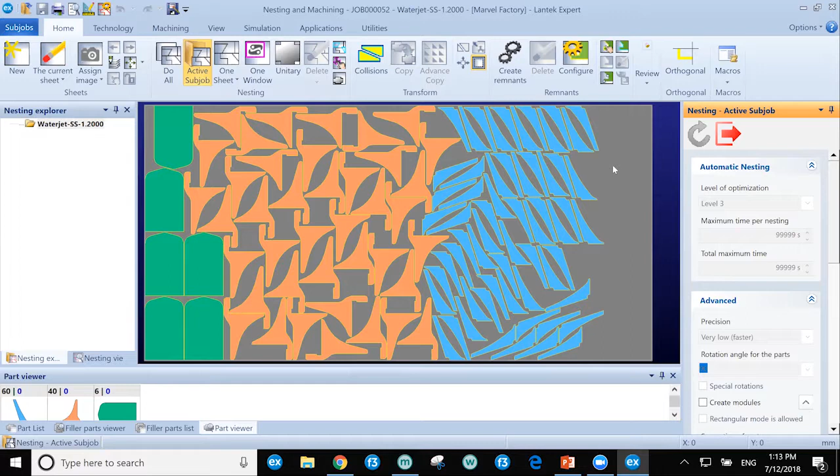Okay, so I went ahead and clicked on our Do All button. This is something Lantek's pretty well known for, the ability to dial in your particular requirements based on your material type and your thickness and your machine tool. So very specific settings and rules that you can make, and Lantek will apply those rules. In this case, it's looking for remnants that it can use to eliminate additional scrap.

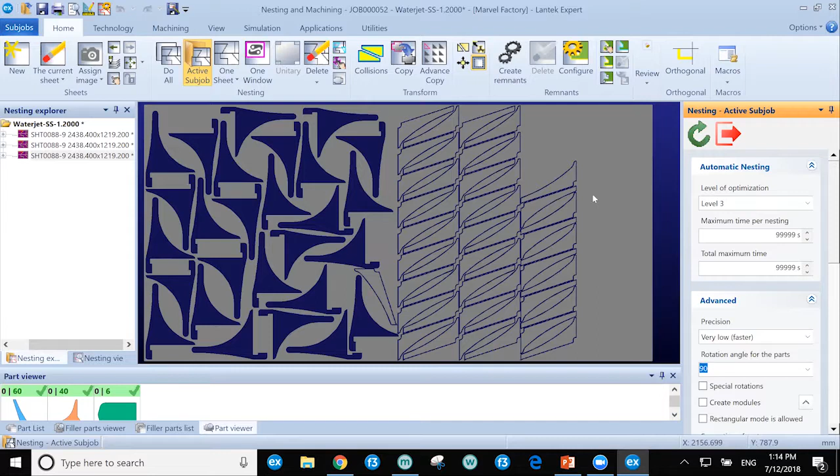It's going to go through and nest all of the parts, and then at the end it's going to ask me what we call the 20% questions, things that you may only want to change 20% of the time, but so that you don't have to go digging through any sort of menus, they pop up for you. Of course, these can be disabled as well. Now that we have our nest created, we can look at the different sheets that we're using. It looks like we were able to use 3 different remnants, which is good.

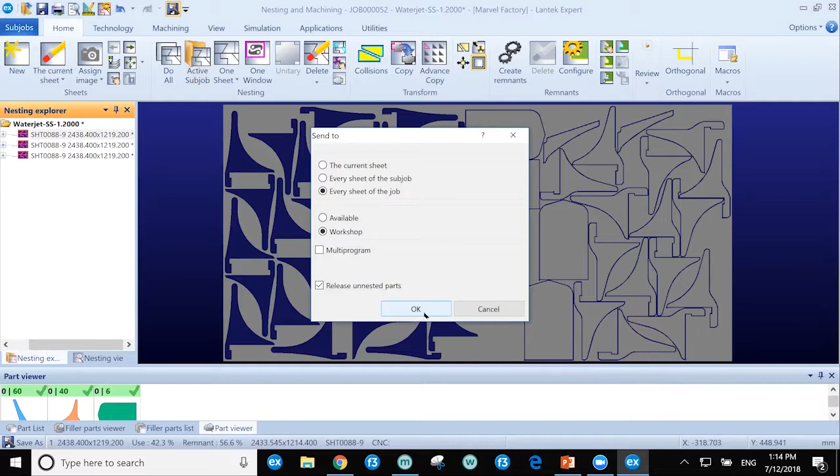We could spend all day on probably nesting, so I'm just going to go ahead and show you how it goes back out to the workshop. With one click, I can send every sheet of the job to the workshop and then have it release any unnested parts. So parts that did not fit on the amount of materials we have, or that for some reason I just didn't decide to have in my program. We can also automate the naming and saving of your CNC files and the directory to where those go.

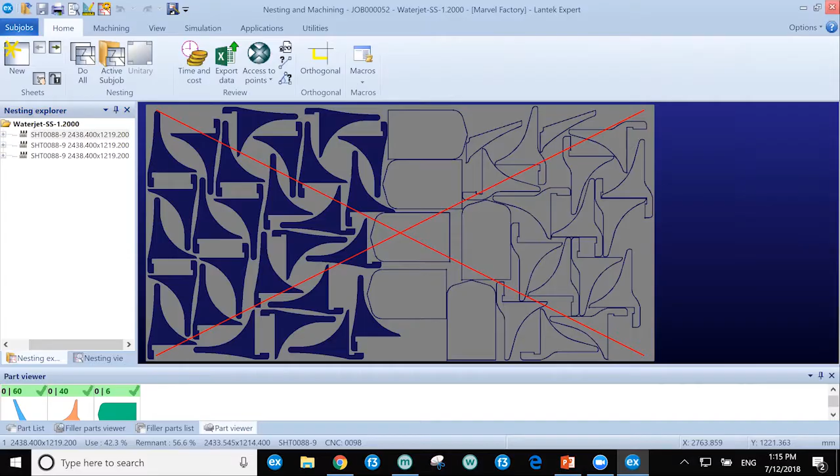And at this point, we're finished. So we have all of our tooling, machining, and you'll see this big X means that this has been sent to the workshop. Once we're back into Manager, we close that window. Manager is here for you. And I think what we could do now is basically look and see what others using the system might see.

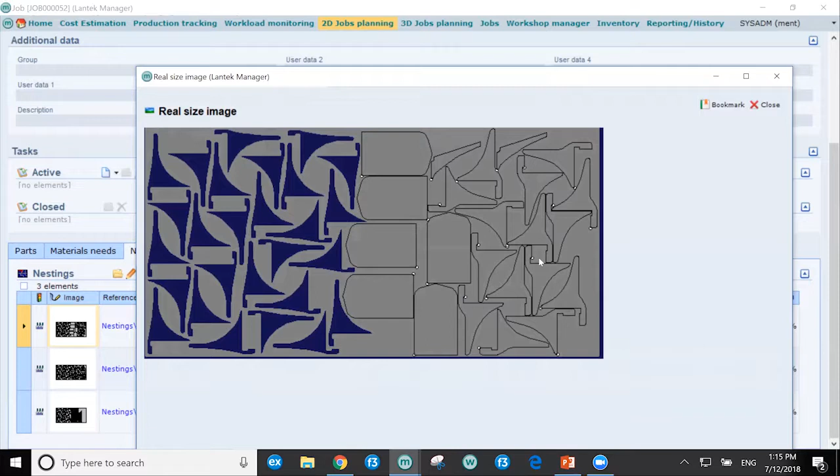If somebody wanted to look up this job or look for a particular part in this job, they would be able to get a quick view of the nest itself, without having to start a CAD/CAM license or require any additional project or products. We can look at estimated times that are going to be required for this specific nest. We can look at how close we are to our deadline, and we can see, with and without the remnant, what amount of the sheet we are actually using, keeping in mind that those were on remnants already.

Then the next probably most common place for our users is going to be in the workshop manager side of things. And this is where once all of those jobs are created and sent into production, users are able to go in and see not only where things are in process, but to find out what order they might want to do things in. In this case, we can click on our fiber laser, we could go to our water jet, and we have the same indicators here.

So those 3 nests that we just made, those remnants are not at the location required for this machine. So we have these red light indicators letting us know that perhaps somebody with a forklift needs to go and bring those 3 remnants that we nested on to the machine tool. We can see any amount of things that are in process with their estimated times, and we can change the priority of these on the fly, assuming we have the right permissions. So for example, I may want this sheet of this nest all within job 41 to go next. There may be a hot part on there that I have to get.

We also have the ability to take kind of an even higher level look at our workload monitoring. For example, on the press brake side or on the water jet side, I could go over and filter what I'm looking at to see, in general, what am I looking at as far as my deadlines and whether or not I'm going to be on time. This deadline, you'll see here, is yellow. It's an adjusted deadline because we've already exceeded our delivery date on some of these items. And so this is our new deadline that we've associated for ourselves just by going through and saying calculate the deadline. We can also get an idea of a couple of production orders, and see that those are going to take 47 minutes to get to for our users.

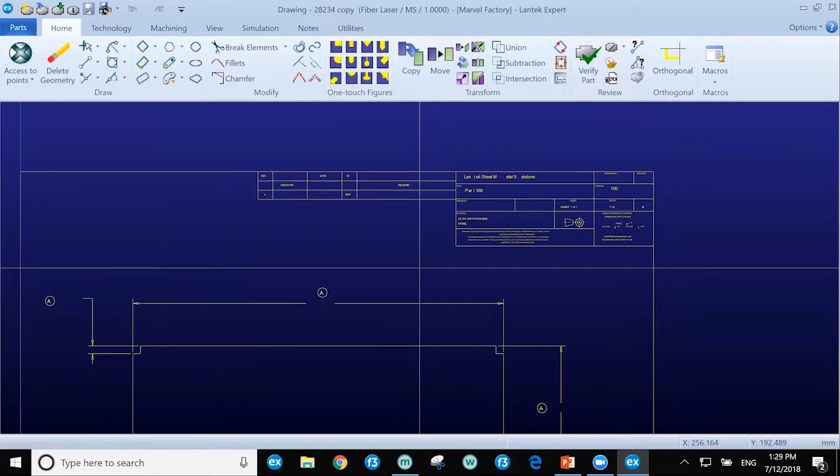But if I go into our drawing mode, we have a tool that will allow us to quickly grab the pertinent geometry and avoid all of these other drawing block details.

And that's called our Detect Part tool. And by just clicking on any piece of the outside geometry, I'm able to bring in the part's geometry itself. If I wanted to modify the geometry, I could. And I can also go in and actually change any of the types of cutting process if we maybe had some bend lines in here, or give it a scale factor. In this case, it'll use dimensions to scale the part. And we just click OK.

So now that I've created that part, the system can order it, or I could just simply see, what is that part going to cost to make? As soon as I assign it a machine tool, which I did, the fiber laser, I'll be getting a cost and an estimated time for this.

And that cost is going to be the material that I've selected. Depending on my settings, it could be a rectangle drawn around the part, or it could just be the external geometry of the part with some sort of a buffer. But this gives you an idea of how you can know what this cost for this part is going to be with very little interaction for getting to the quote.

I can even assign it like we did before, I can assign a new routing. I could take our laser, bend, weld, and ship here. And I can put in or have calculated the estimated times for these. So if I feel like I know the estimated time, or I'm set to estimate this time, or again, I can rely on the system to know based on the rules that I've set what that time is going to be. So now, oops, I didn't delete my old routing. So now that we've basically gone in and saved that, you would have the new routing with this part, like I showed you before.